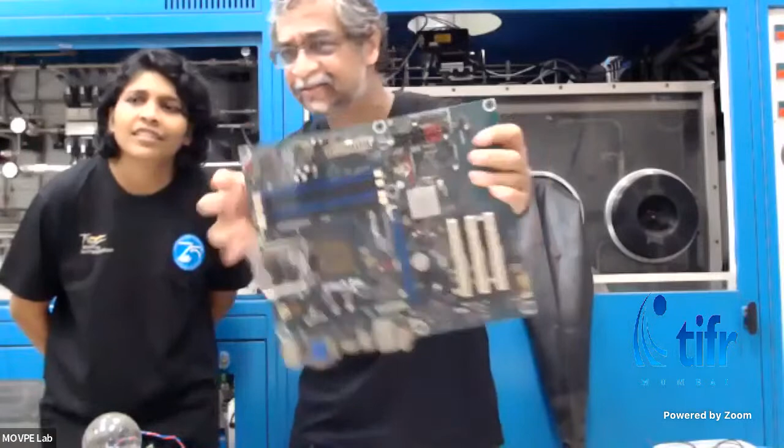Good idea. We should tell them what semiconductors are and what optoelectronics are. Let's start with electronics itself. Have you seen something like this? Manisha, do you know what this is, the thing I'm holding in front of the camera? I think we can ask the audience what it is made of. It's a circuit board.

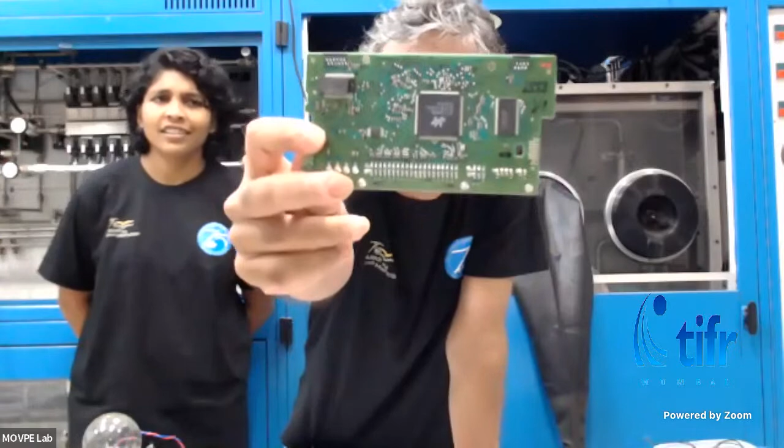Okay, so this is a circuit board, the motherboard for a computer. I took it out, and on these boards you find lots of these printed circuit board cards which have these chips on it. You can see these chips. Manisha, do you know what these chips are made of?

We should ask the audience. Audience, why don't you put in the chat what these chips are made of? These semiconductor chips that you see in these boards, or even on the motherboard, what are all these chips made of? Let's see what people are putting in the chat. So folks who are looking at the chat, please tell us. Somebody read out what people are saying. We'll give them a little bit of time. What are people saying on YouTube? What are people saying on Zoom?

Anyone? Is it a semiconductor? Okay, great, that's correct. These chips are made of semiconductors. And do you know which material is used as a semiconductor? They're saying silicon. Okay, that is correct. Most of the semiconductor world is made of silicon. And silicon is great. Silicon allows you to make these transistors, make all these chips. You can make various things - computers, electronics, radios, TVs. All that is the world of silicon.

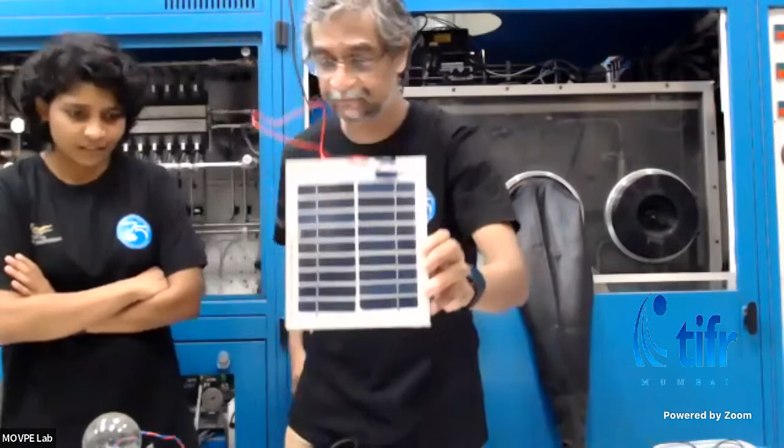Silicon is also very important because you can use it to make solar cells, right? Here's a solar cell, and we have three little LEDs over here. Let's see if they're glowing - not in the room lights, but we have some really nice and big, good old lights over here. So Manisha, do you want to turn it on?

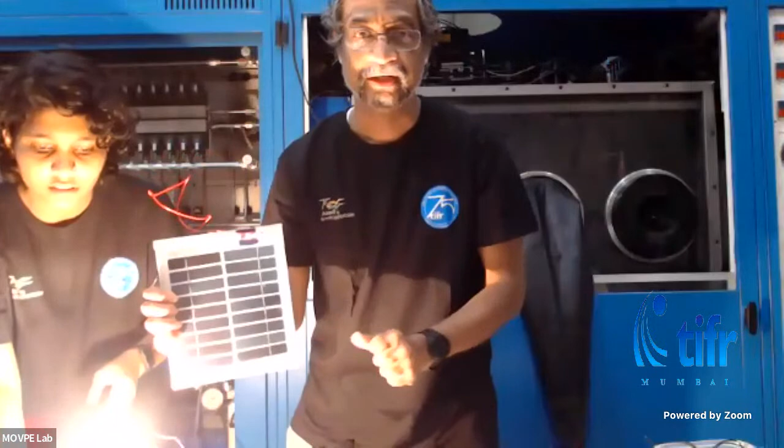Okay, and now you can see these - well, you can't see these, but maybe what we can do is cover this a bit. Yeah, you can, but you could have showed. Okay, turn it off, turn it off. Did you see the top three little dots? They went on and off. Turn it on again. So look at the dots over here. Yeah, you can see a little glow coming. Those were the LEDs we had connected to the solar cell. So silicon also makes solar cells, and that's another very important aspect we want to cover today, of course.

Have you ever wondered what is inside one of these chips? I'm just going to show you. These are very old things. TIFR actually started silicon work in India in the 1970s, and I still have stuff in the lab.

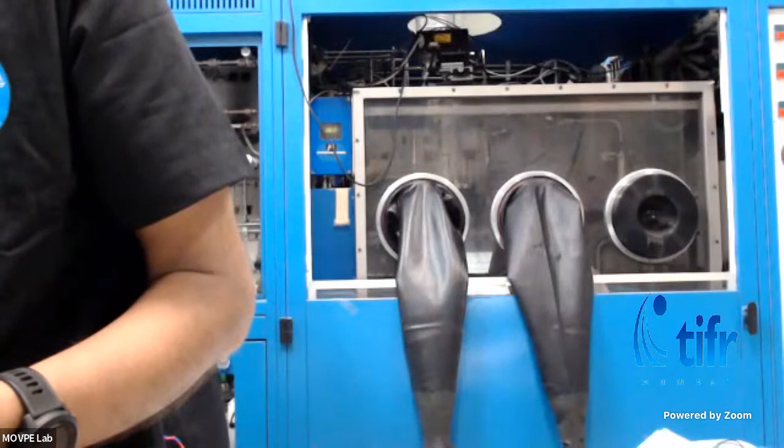Can we enable chat for the audience? Why is it not enabled? Please enable chat for the audience. Whoever is on YouTube, chat on YouTube or chat on... Ulhas, can you check if chat is enabled on YouTube? If it's not, please enable it. Anyway, while we do that,

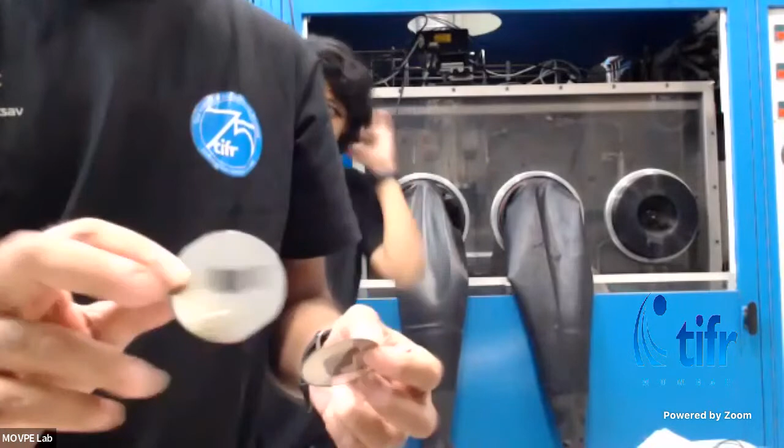yes, somebody has said germanium is also a semiconductor. That's correct. I'll come to it in a second. But these shiny things are what silicon wafers look like. And when people make circuits out of this, what is inside the thing is actually, oops, it's so shiny that you can see the reflection. Let's see if I can, yeah.

This greenish thing that you see, a lot of small things in it. That is, yeah, there you go. Let's focus. That is what is inside one of these little chips, but that's again not what we are going to do today.

There's something called opto. Remember, I said opto. Opto comes from optics or light. So silicon is used for optoelectronics. Silicon is used for solar cells. Silicon is great at absorbing light, but silicon doesn't emit light.

So if you want to make something that emits light, something to replace the bulbs, tube lights, CFLs, right? Then you need a different material. Okay, I won't explain right now. Maybe in the end, if somebody asks why does silicon not emit light, we can look at it.

But okay, I can't see the chat, right? So if there's something interesting happening on the chat, please let me know. Or the Q&A box in chat, both of them. Yeah, if there is something, I'll stop you. Yeah, we'll stop. We'll interrupt.

You keep saying semiconductor. So maybe we can ask the audience what a semiconductor is. Okay, good question. Yes, we should absolutely know that the audience is with us. I see somebody's name says 7A, so I assume they're in the 7th standard. So I hope you've heard the word semiconductor. Maybe you can put in the chat what is a semiconductor. Do you know? If you've heard of conductors, insulators, semiconductors.

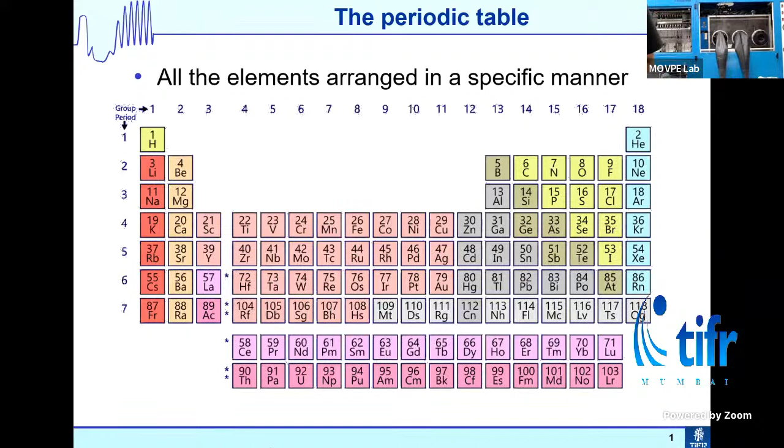Okay, so let's start with the periodic table. In the periodic table, there are what we said were semiconductors. This is silicon and germanium. They are in what is today called group 14. Earlier it was called group 4. So these are the materials. And you must have heard people talking about bands. So in case you don't know what a band is, let me tell you.

Suppose you had just individual atoms. Individual atoms have energy levels. There's some lower energy level, higher energy level, still higher energy level. Now, that's for an isolated atom. When you make a solid, you bring many, many atoms together.

If you bring 2 atoms together, the individual levels will double. If you bring 3, they'll become 3 more. When you bring millions and billions of atoms together, remember that solids have 10 to the 23, Avogadro's number kind of atoms, then you don't see these individual levels anymore.

They all get mixed up and they form something called a band. And depending on the energy the electron has, some of these bands have lots of electrons in them. Some of them are completely full. If it's completely full, there's no space for another electron to go in there. Sometimes the band could be completely empty, in which case, if I put an electron there, it can travel because there's lots of space in that band.

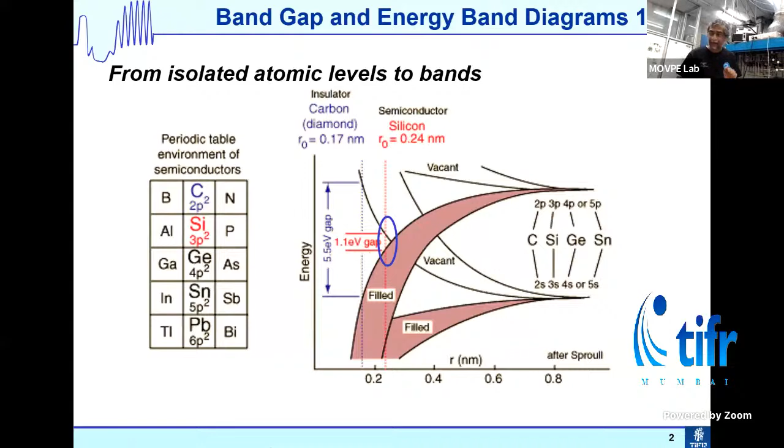So resistance depends also on the length and the area, lots of other things. What in physics people mostly refer to as resistivity: how much resistance per some area that the current is flowing through. But don't worry about it. The idea is correct. Well, let's go on. So we know what a semiconductor is. But remember I said silicon doesn't emit light.

What kind of semiconductors do we use? What would emit light? You know what? We have to make artificial materials. So how do you make such materials? We make it in this big box, but before that, let's see what are the materials we make. Okay. So again, what you see on your screen is a part of the periodic table.

Now, you will call it group 13, 14, 15. When I was in school, there was still group 3, 4, 5. The people who started this field of research, when they were doing their research, it was also called group 3, 4, 5. So we'll just refer to that. So now, remember carbon, silicon, germanium, all these materials are in group 4.

So germanium is sitting here. To the left of germanium is gallium. To the right of germanium is arsenic. If I take one atom of gallium and one atom of arsenic, I can make a structure that resembles germanium.

So if you take an element from group 3, the boron, aluminum, gallium, indium group, and an element from group 5, the nitrogen, phosphorus, arsenic, antimony group, and you combine these, you can also make materials which are semiconductors. Of course, these are not elemental semiconductors. These are compound semiconductors because we're making a compound of elements.

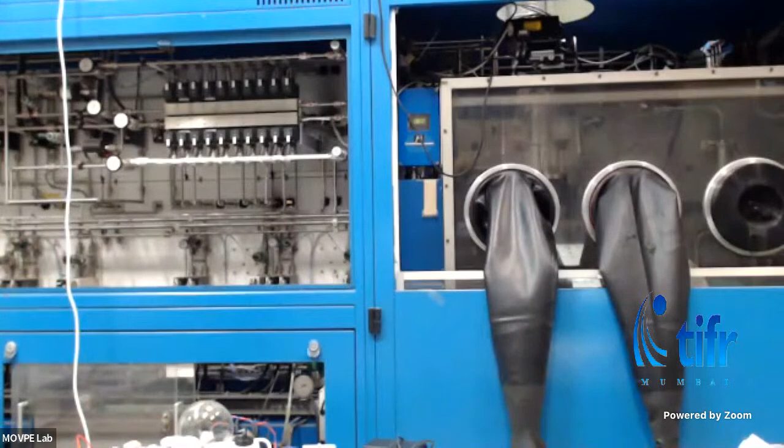So let's just see. Maybe I'll share the screen again. Yeah, can you just share the screen perhaps? Maybe it's a good time to just take a look at the chat as well.

Okay. So what we do is we are depositing these materials using chemical reactions in a layer by layer manner. So how do we start? What do I use for my gallium? I don't use gallium. I use gallium with 3 methyl groups. Methyl is CH3, methane is CH4. CH3 is the methyl group. So trimethyl gallium: gallium atom, 3 methyl groups attached to it. For the nitrogen, I start with ammonia. Ammonia is a gas. You might smell ammonia in the chemistry lab. Any public toilet, the smell you get, that's ammonia.

So we start with ammonia, which is a gas. We start with trimethyl gallium, that's a liquid. We convert everything to a gas. I'll explain this, it's vapor phase epitaxy. But let's look at what chemistry we are doing. So we are taking this trimethyl gallium and ammonia, and we will heat it up. Heat it up how much? Maybe something like 800, 900, 1000 degrees centigrade. Make it hot, really hot.

At this temperature, this ammonia breaks up. So I can get nitrogen from there. Nitrogen and hydrogen. Yeah, I don't care about the hydrogen. I want the nitrogen. And for the trimethyl gallium also, these methyl groups go away. So when I get trimethyl gallium and ammonia at the high temperature, these methyls go away. So there's gallium, there's nitrogen because the hydrogens have gone away. So gallium and nitrogen can deposit and form gallium nitride. It's not that easy.

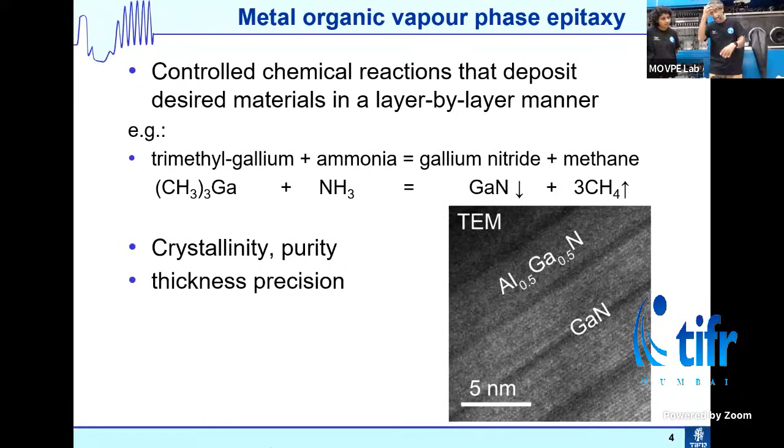Can we just have the next one? I'm just wondering what it is. Yeah, just go ahead. Okay, go ahead. No, the previous one. Yeah.

So now, of course, this equation is very simple, but I want to really grow high quality materials. I want to grow different materials and make LEDs and transistors and make devices. So as a person who operates this machine, what do I change? I can change the temperature. I can change various things, the pressure, the gas I use. So let's now look at, you can stop the screen share.

Now, we'll tell you a little bit about what happens in this lab over here. So what are we trying to do? We are trying to take trimethyl gallium, react it with ammonia, and make gallium nitride. And what we will do is, we will deposit it on a wafer, on a piece of sapphire. So this is a sapphire wafer. You can hold it near the camera. This is a sapphire wafer. We will deposit this thing on it.

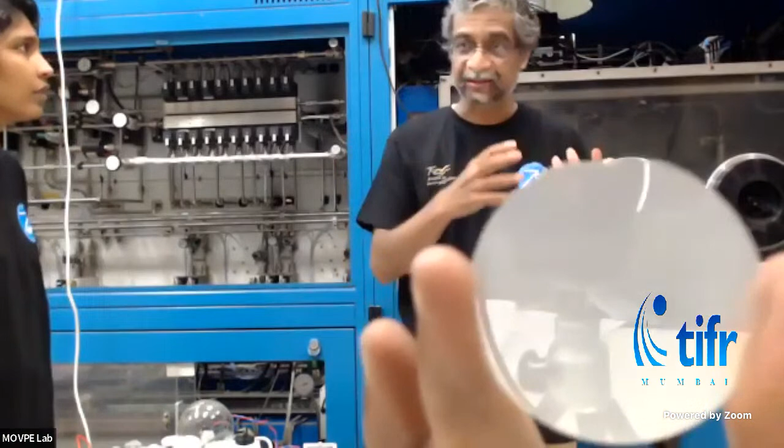Why do we use sapphire? Well, can you tell us something about the substrate we use? I heard something about lattice matching. Yeah, okay, lattice matching. We're already getting into that. We'll definitely come to lattice matching. But maybe what we'll do is we'll tell them what all this is.

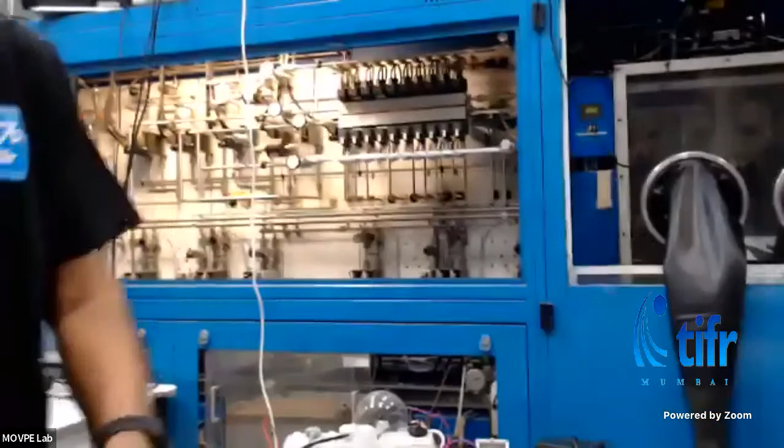Yeah. So right now, let's do one thing. Let's turn the light on. So this. Okay. Yeah, you can just hold it so I can tell you what is what over here. So let's turn that light on also. So we will eventually go there. I'll take it there.

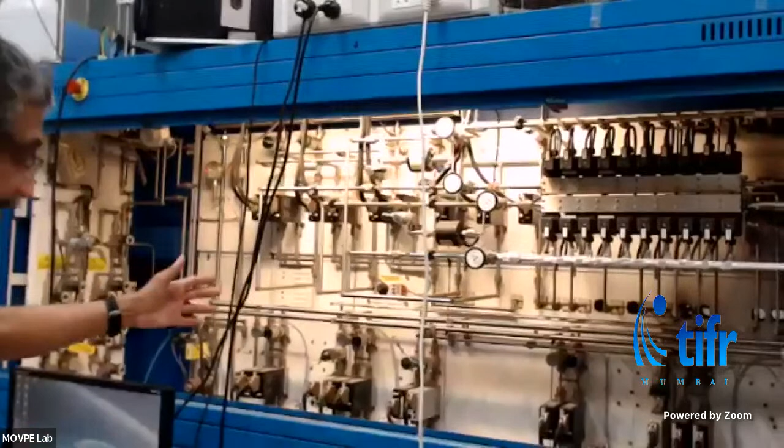Okay. So what we have here, this part of the system, this is all chemical engineering. It's all chemical engineering designed to transport the correct amounts of these reagents for the reactions into the place where the reaction will happen. So what we have here are all kinds of valves. It's a maze of valves, pressure controllers, flow controllers, everything designed to mix. So suppose I'm doing aluminum gallium nitride, I need to mix the correct amount of trimethyl aluminum and trimethyl gallium.

Now, you asked me, trimethyl gallium was a liquid, right? Yeah. And everything out here I said will happen from a gas. Yes. So how do you convert a liquid to a gas? Well, one thing, you can boil it, you get a vapor. But at any temperature, for any liquid, above the liquid there is some vapor. Some molecules are always evaporating. So what I do is, I have these liquids in a container, and I bubble.

Just imagine taking a straw and blowing through it, and you get bubbles coming through the liquid. You bubble a very, very pure gas through it. Remember, purity is everything over here. Which gas? Well, right now you can purify nitrogen also, but the only gas which you can purify to 99 and then seven nines pure is hydrogen.

So do we purify the gas here? Yes. Nobody in India sells you 99.9999 that kind of hydrogen. But hydrogen is one element which is, not easy, but possible to purify. And that's because there is another element that comes to the rescue. This is a metal called palladium.

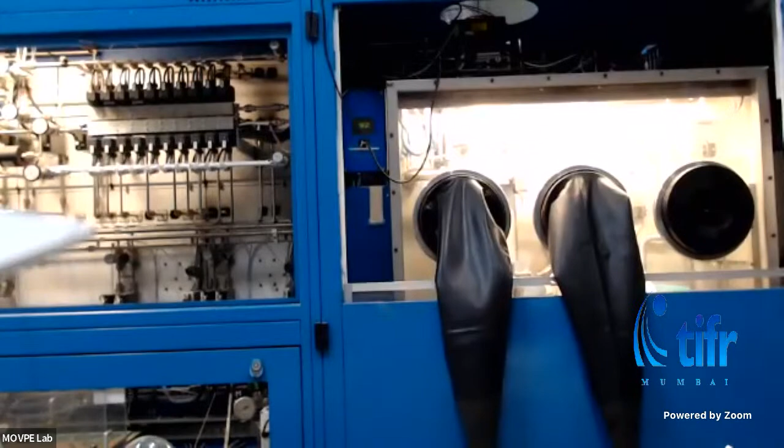So I was wondering, what are these gloves? Ah, the gloves. See, remember, I've said purity is everything. But we are in Mumbai. There's so much dust in the air, so much pollution, TIFR is right next to the sea. There's so much water vapor in the air. Not good. We don't want all those molecules.

So one option is you keep your entire lab super clean. But what we decided is, only the place where the reaction happens, we'll keep it in what is called a glove box. Rahman is going to come here and show you how this is used. This glove box has extremely pure nitrogen inside it. So whenever we open the reactor, put stuff in, it never sees the Mumbai atmosphere. We keep it isolated and very pure by using ultra pure nitrogen.

And how do we put things inside this box? Well, what do you think? We put things inside 10 years back when we built this and never put anything? No, of course we need to put things inside. Well, it's got something called a load lock. We'll show you the load lock later. There are two doors.

So there's a region in the middle. You open the outside door, you get something in, you shut it. Then you remove the air from it, put nitrogen back. Do this many times. So now the region in between, which was exposed to the outside air, only has the pure nitrogen gas. Then you open the other one and take it inside this chamber. We'll show you that.

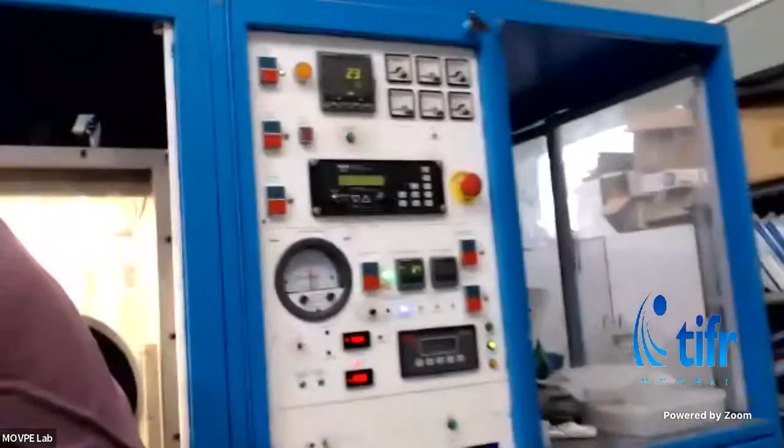Let me do one thing. 1 second. Let's keep the laptop here. Let's carry that. And I'm going to hold this and try and see what we have.

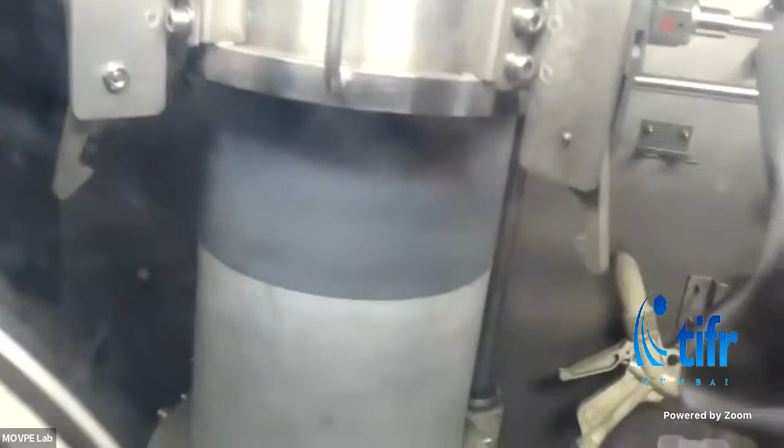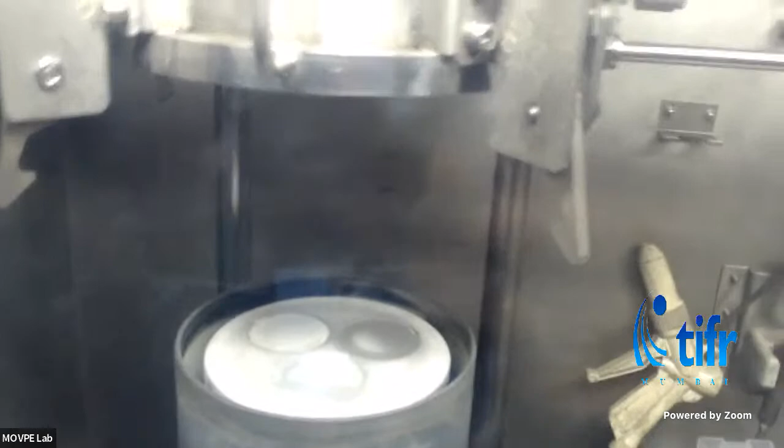So here is Rahman. He's going to operate the thing, but first let's show what is inside here. What you're seeing inside here is a reactor. Why don't you lower it so people can see? Good. So what you see here is a plate. I see 3 circles. You see 3 circles because this is a plate in which you can keep 3 of these wafers, the wafers we showed.

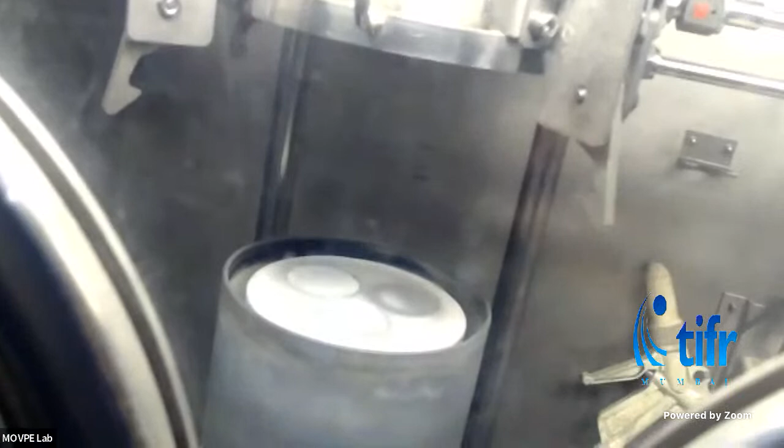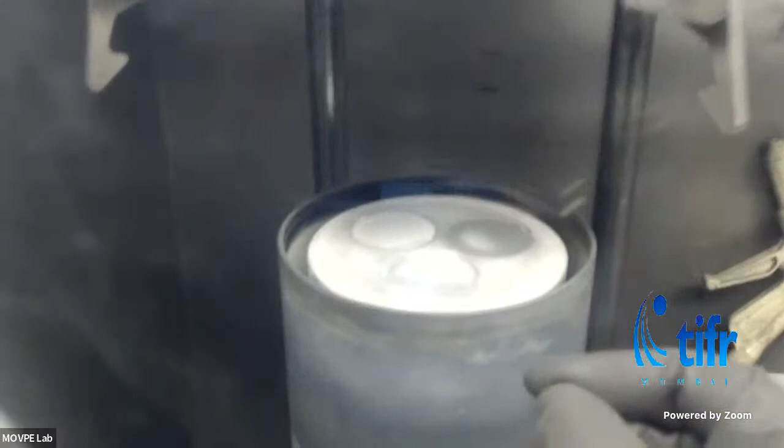You can keep 3 such wafers in it. Or okay, we can just show them that. And then this whole thing will move up, and below this plate is actually a heater which can heat things up to almost 1200 degrees centigrade, depending on the material we are growing.

So from the top, you saw where the gases are mixed, then the mixed gases come to the top over here and there are tubes through which it comes in. It's tough to show you that because we'd have to put the camera inside the box, which is inside the glove box, which would be tough. But yeah, this is the reactor, actually, where we think you can put it up.

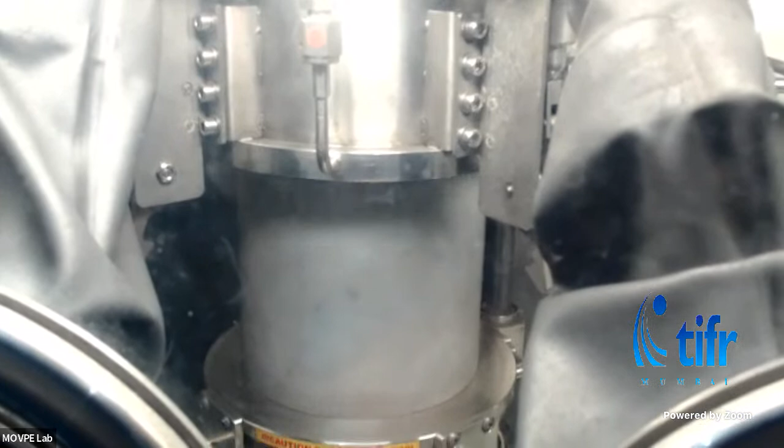So we would load this thing, and then it would go up, and the gases come from the top over there.

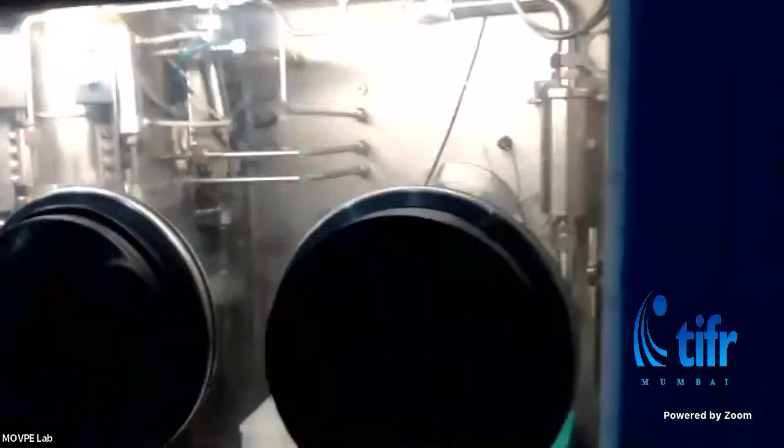And what you asked earlier, you see this little door over here? This is the door. You can open it from this side and get things inside. This is the connection to the outside world. You open that door and get things in. There's a compartment between this place and here. This is the outer door. So you can open this, put whatever you want in. Right now we're in the room, this is the access from the room. You put stuff in here, shut this door, and then there are a lot of...

So there is nitrogen inside. Right now there's nitrogen, but when you open it, there'll be air inside it. So there's a vacuum pump - you can remove the air, put nitrogen, remove the air, put nitrogen. It does this automatically, actually three times. And then you move this door - you can open this door from the inside after closing that door. If you don't close that door, of course it will not let you do it.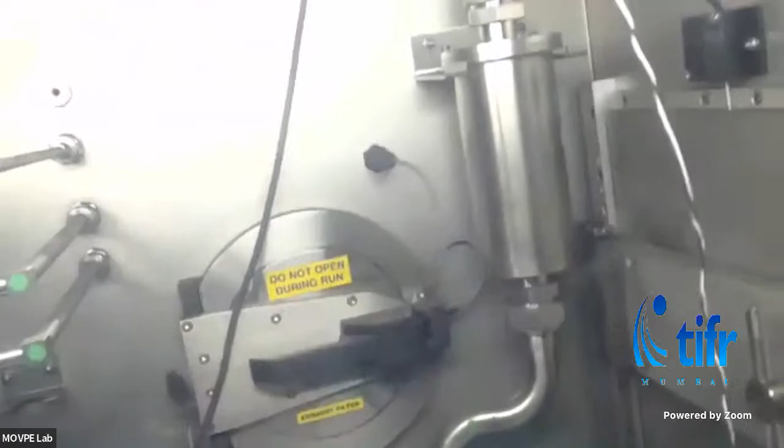And this is what you have. Of course, inside there are lots of other things to clean the place and pick things up. You have to pick it up using some vacuum - you can't pick it up with your hands. There's a little vacuum pickup that helps you pick it up.

Okay, so yeah, that's it. And I do see large bellows coming from the reactor top and going onto the roof - what are those bellows? Oh, you're asking what are those? These things at the top. Yeah, and lots of tubes all around there. Yeah, okay, so it's okay, it can be there.

What is the name of this whole machine? This whole machine is called a metal organic chemical vapor deposition system, or a metal organic vapor phase epitaxy system.

Now, remember I said that we have to be very careful about purity - everything has to be very pure. But there's another equally important thing: we have to be very careful about safety as well. Did you ever like to smell a public toilet? No, you didn't, right? So ammonia smells bad - you must have smelled it in the chemistry lab as well. Ammonia smells really bad, but at least when you smell ammonia, it's at a limit that won't kill you. You smell it before the level at which it becomes really toxic or dangerous.

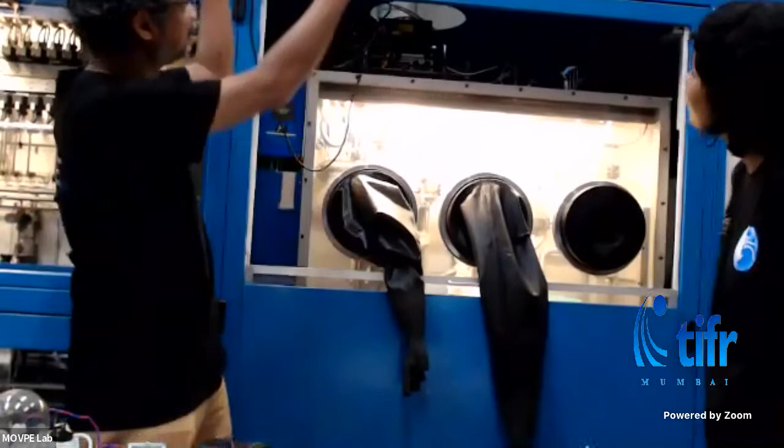Step one: you see these big things above the reactor, these two very big pipes going up. What we have in the roof are very big exhaust fans. Remember the exhaust fan in the kitchen? That's small, probably a few hundred cubic feet per minute. We have two fans of 3,500 cubic feet per minute, just sucking the air out of the room.

Today we're not operating, so we've removed these covers to show you, but otherwise everything is usually blocked off, with little slits through which air goes in, because the air is being sucked outside the system. So the idea is, in case a pipe breaks or there's a small leak, nothing will come into the room. It will go up into the roof, and there's so much dilution, mixing it with so much fresh air, that when it goes outside it's probably below the limit.

Also, we are using hydrogen as the carrier gas. We flow maybe a few liters of hydrogen every minute, and when we are really growing, it could be 20 liters a minute. Hydrogen is flammable, and we don't want a hydrogen leak. So we have lots of toxic and flammable gas hydrogen sensors around, and our sensors are so sensitive that we will detect a very, very small, parts per million leak.

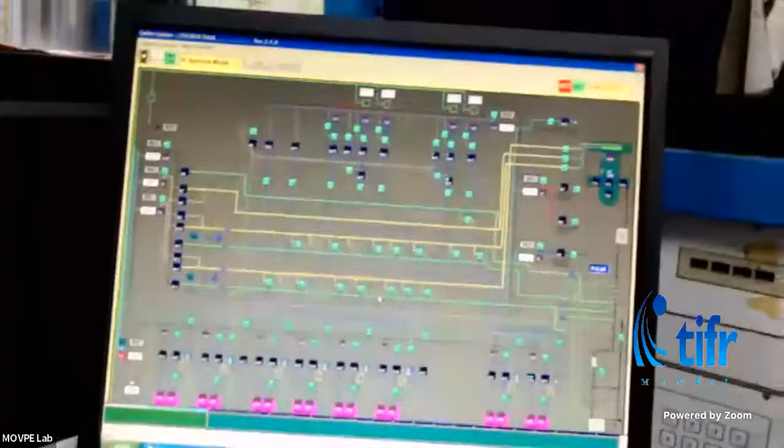So how do we control the system is a good thing - maybe we'll show them the control screen as well. It's almost like playing a video game. There's no physical way to control the valves here; they're all controlled by this computer screen.

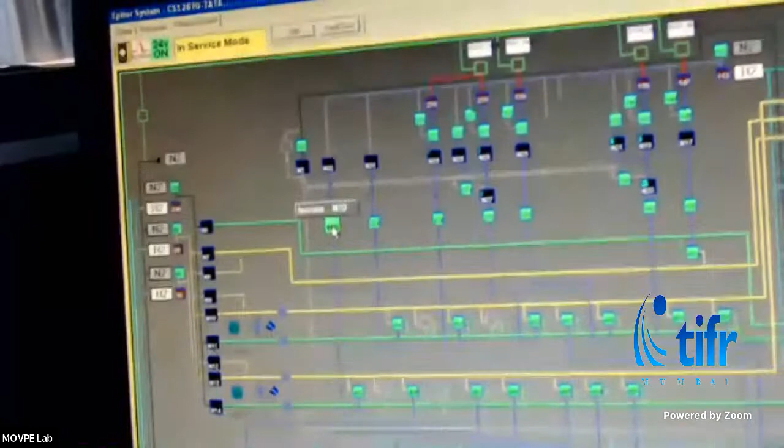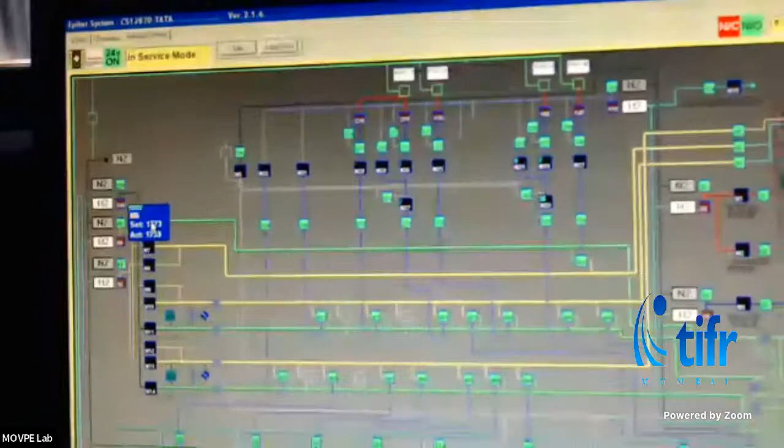This screen shows the position of all the valves. If I click on a valve, you see it changes color - I've shut it off. And if I click on a flow meter, I can change the value of the flow, and if I send it, it will change the value. So it's almost like playing a video game - you can control everything from here.

You can also write programs that control all this for you, because if you're controlling 100 valves at a time, you can't do it manually - you can't even click, you'd go mad. So you write programs that tell the system what valves to operate.

Okay, so at the end of it, what happened? Oops, no, somebody pressed something. What's going on? It's got disconnected - the camera seems to have moved.

Okay, we are back on. We've got the camera back on. Sorry, when we moved the laptop, we disconnected the camera by mistake. That's live, that's what happens. You're live in the lab.

So now what do we do here? What do we make here? How does this thing look? Let me tell you what we do. What do we deposit layer by layer? Let me just quickly show you that.

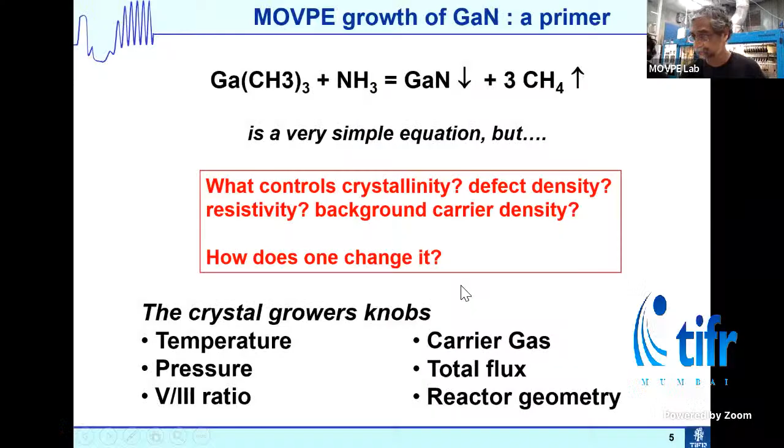So one of the simple things machines like this make are light emitting diodes, LEDs. You may have heard of a diode, it's something that allows current to flow one way. A diode requires two kinds of semiconductors, a p-type one and an n-type one. Don't worry if you don't know what that is. The stuff that happens where the p and n-type materials meet is called a p-n junction.

At this junction is the secret sauce for the LED. What do we do? On sapphire, we grow gallium nitride about 1 micron thick. 1 micron is about 50 times thinner than your hair, or 100 times thinner. If you have nice thick hair, for me it will be 50, for you it will be 100.

Then you grow some N-type gallium nitride and P-type gallium nitride, and in between the two is where you have what are called quantum wells. Quantum wells are very thin layers of semiconductors, we have indium gallium nitride. How thin? 4 nanometers thin, separated by 10 nanometers. This is the region that emits light. By controlling how much indium I put in the indium gallium nitride, I can control the color.

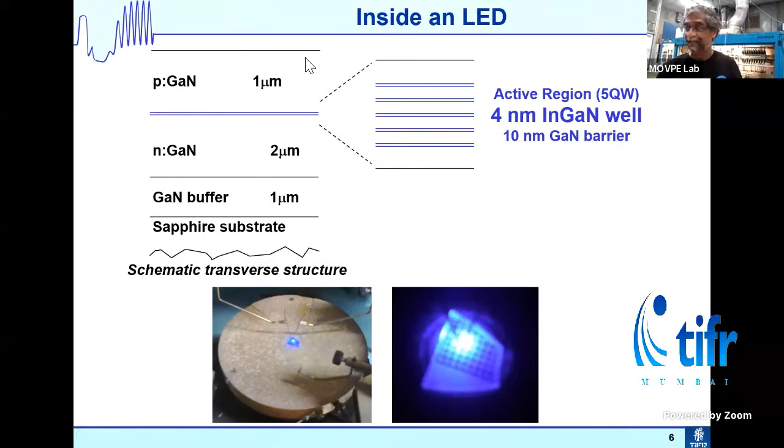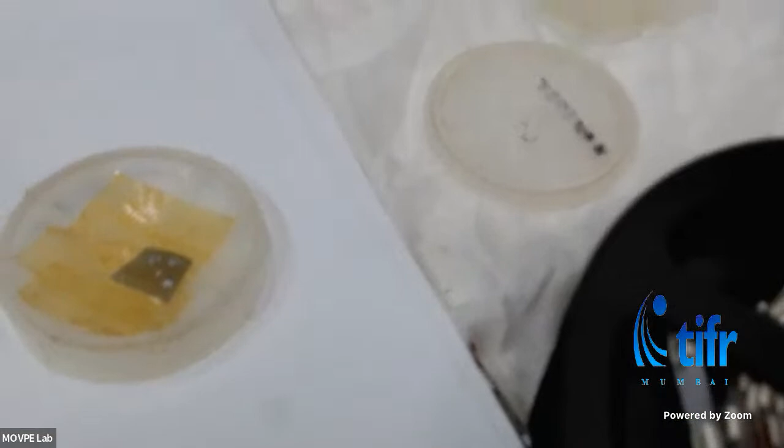So here you see some devices which we had made. But the beauty of it is, because it's blue light which you can see with your eyes, we can actually show this to you right here. So Manisha will show this to you. First let's see what we have: a little piece of semiconductor on which we've made some contacts, contacts to the N and the P.

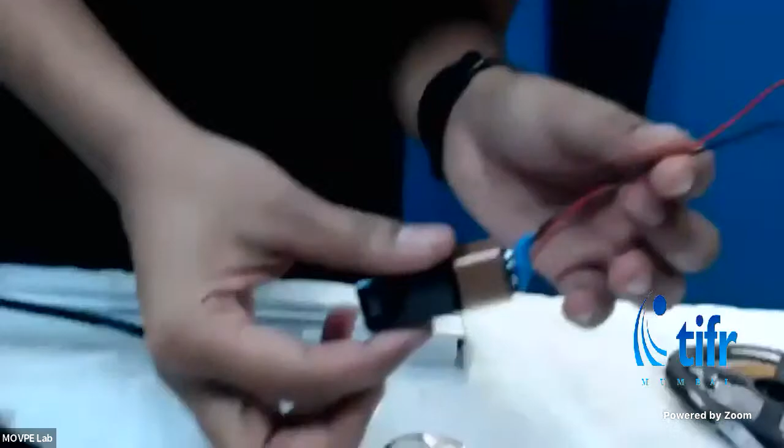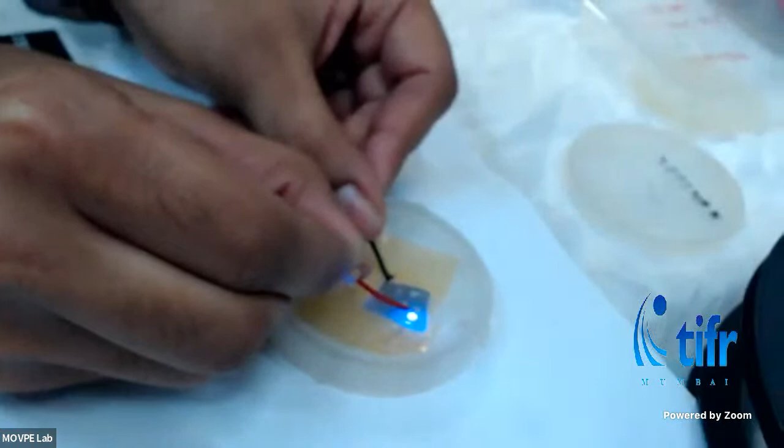And what Manisha has in her hand is a 9-volt battery and some wires. She'll just try and connect the wires N to N and P to P. And you see it's glowing blue. That is a blue LED which was made in this machine right here. Okay.

The nice thing is, how do we actually... wait, let me just see if I can go to the next slide. Remember, you want to make LEDs of different colors. Now the simplest way to do it: I have a reactor where it's very difficult to say, okay, put exactly 23% indium in. We can't control the indium concentration so much. The way we do it is by playing with things we can control.

This is again Preeti's work, where just by playing with the temperature - remember I said I can heat this up to 1200, I don't have to do it, that's the maximum - if I grow something at 725 degrees centigrade or 775 Celsius, it'll just depend. In one case you get blue, in the other case you get more indium, you get green. So that's what we do in our everyday research, we are playing with the parameters to try and change the kind of materials we grow.

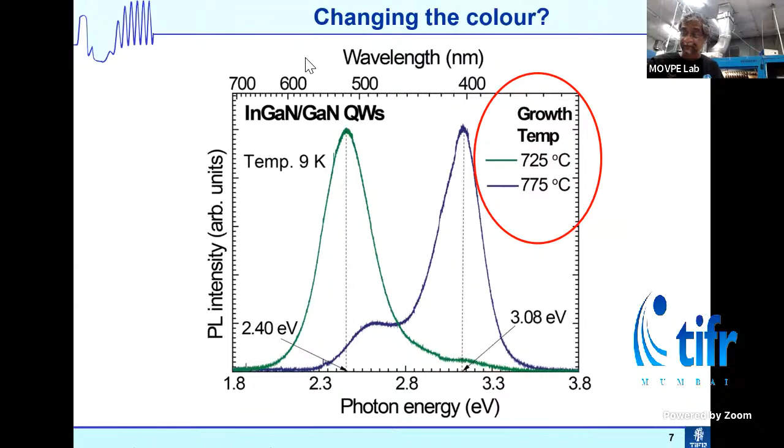And yeah, these blue LEDs are super important. If you remember, about 10 years ago, Akasaki, Amano, and Nakamura got the Nobel Prize in Physics for inventing the blue LED, because the blue LED allows you to make white LEDs.

And what I didn't tell you, of course, is how do we make these chips? I think somebody asked in the very beginning, how do we make these chips? First you must understand how small these LED chips are. The LED, of course, you can see it - if you have a mobile phone, you can see your flash, that is an LED. You can see how small the chips are.

What we would do when we grow a wafer: suppose we had a wafer of gallium nitride or some LED structure which was like this. We would take it to another lab, which is called a clean room, and then we would make devices out of it. We would put metal contacts, say where does the current go, where does the current come out of, and then put wires through that, etc.

And these chips are really small. I don't have LEDs with me. I have something else which was made in our lab, not in this machine, in another older machine. These are lasers, laser diodes, the lasers in your laser pointer, laser printer. They're also very tiny. And how tiny are they? Well, there are many in this box that you don't see. So let me just take some out. There are hopefully some of them here. Yeah, so this is a box.

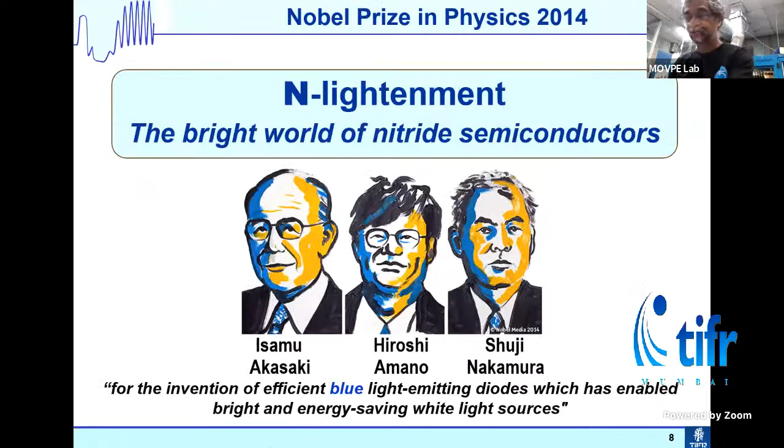This is something the camera is not even going to pick up. Many of these things, the lines that you see, the little small things, usually will have about 10 chips on them. So these chips are really, really small. If you want to know more about how we make them, you can ask me later. But let's see something about white LEDs. How do you make white light? Remember, they got the Nobel Prize for making blue LEDs, which enable bright and energy-saving white light sources. Okay, let me just stop screen sharing.

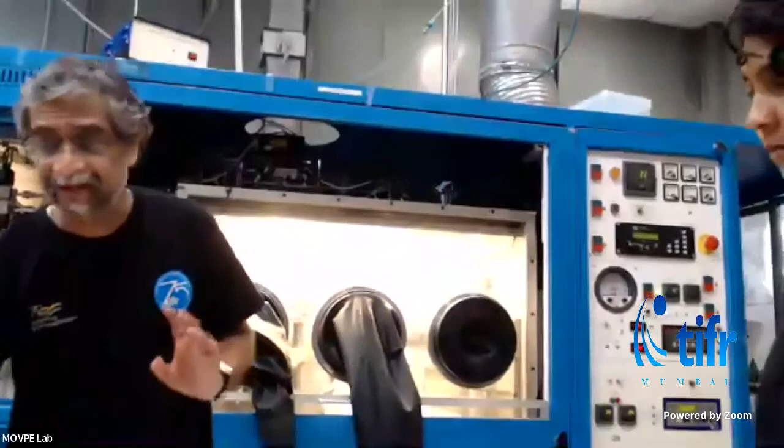Okay, so let's see. You all have mobile phones. Mobile phones have this flash. The flash is an LED. First thing, lighting has changed. Earlier you had these big bulbs, right? The bulbs which glow and get hot, and there's a filament. You can see the filament getting hot, and when I switch it off, you can see it as it cools down. From these bulbs, we went to tube lights, the tube lights which are there in our roof, perhaps. But there are also these compact fluorescent lights, CFLs. The bulb gets very hot, it's still hot. You can't touch it. In operation, a CFL is much more efficient.

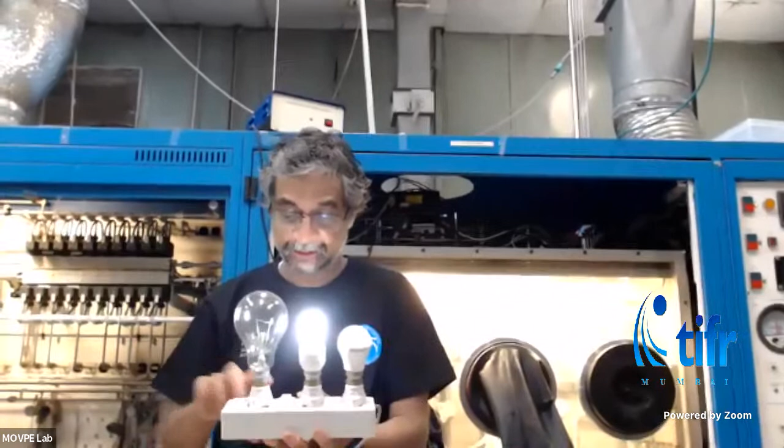A bulb, 95% of the energy is heat, only 5% is light. Tube lights and CFLs are much more efficient. They probably make around 20% of the energy that they get into light. And even more efficient are LED lamps. These are LED lamps which we use these days. Now, what is inside an LED lamp? If I took this bulb and I opened it up, what would we find? We have done this for the purpose of science, and what we have inside a bulb is this. This is what is emitting the light.

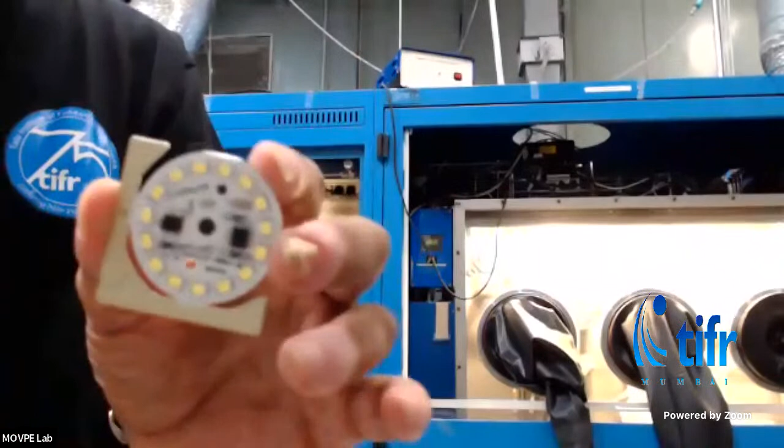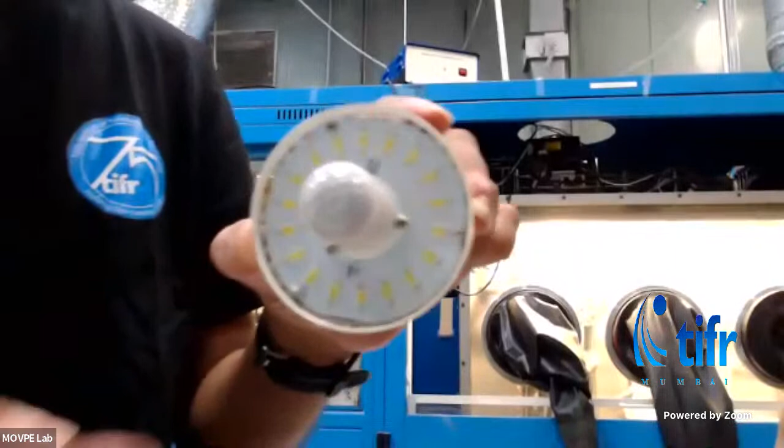As you can see, there are many of these LEDs. And what color are they? Are they blue? No. What color do you think they are? Right, they're yellow. Well, here's a bigger bulb. And here, yes, Mayank, they are all yellow. In fact, look at your camera phone closely. You will see that the LED is yellowish. And if you have a very high-end phone, it might have two LEDs, one of which is slightly reddish. You see, this has two LEDs. One is yellow and one is reddish.

So, but we want to make white light, right? What is white light? White light is a combination of the primary colors. The primary colors are green, red, blue. Now remember, when you mix paints, red, blue, and green give you black. But when you mix light, red, green, and blue give you white. So we have out here red, green, and blue, and if you go sufficiently far away where you can't distinguish them, it will look white to you.

Now, how do you make LEDs? Yes, you can make LEDs. So let me again share a slide to tell you why these LEDs look yellow, because that's the easiest way to make them. One second.

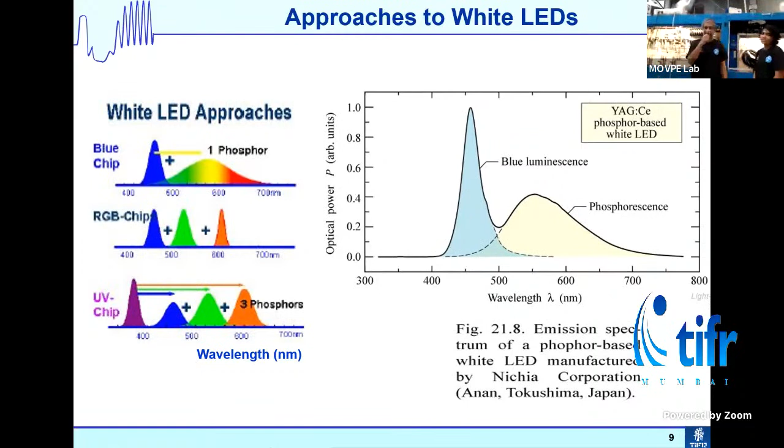So Manisha is asking me whether we can grow only layers in the system or we can do something else. Of course, that's because she works on something else. You have a gallium oxide crystal here? I have. Okay. Manisha works on a different material. It's called gallium oxide. Maybe you can just go near the camera and show them a piece of gallium oxide. She actually grows, not thin layers, but take it.

Okay, you'll have to bend the camera down. Yeah, those glass-like things you see are gallium oxide pieces, and Manisha grows gallium nitride on them. But not gallium nitride layer by layer. What she's trying to do is grow, you can say, skyscrapers of gallium nitride. Imagine how Nariman Point in Mumbai looks with all the skyscrapers, but a million times smaller. So she grows what are called nanowires.

Nanowires, where instead of growing flat, you put down something which will allow the growth to happen only vertically. So you start with a flat thing, and just like grass grows up, you have these wires that are growing up. That's what Manisha works on for her thesis. That's another way of growing things. We won't explain it right now.

Let's see what people have asked, right?

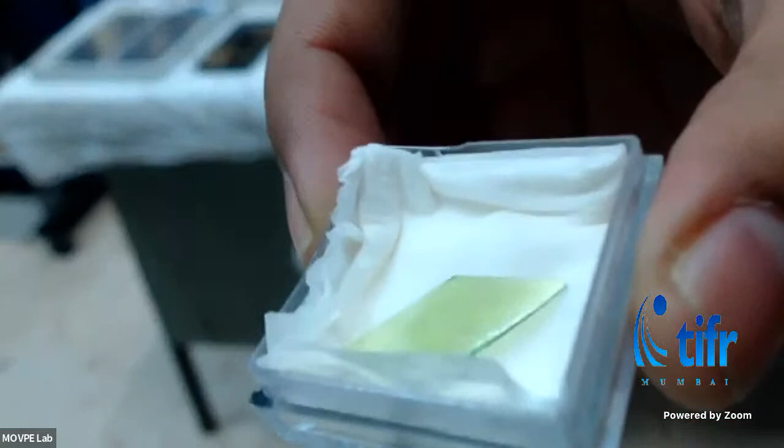There, you see, this is greenish. This is vanadium. This is vanadium-doped gallium oxide. Similarly, when you have sapphire which is doped with other elements, that's when you get colors. Pure sapphire is transparent, and this is not naturally occurring sapphire. These are artificially grown crystals.

You can grow large cylinders of sapphire, and then you can cut them and make crystals. You can get even these big discs of sapphire. We use 2-inch; our system takes three 2-inch wafers. And sapphire is used because it's probably the cheapest material that you can grow on. This 2-inch disc of sapphire costs maybe $10 US if you buy it in bulk.

Gallium arsenide would cost $100 US approximately, order of magnitude. If you had silicon carbide, that would cost $2,000 US. All materials, you can make them, you can get substrates, but they are much more expensive. So we use sapphire. It's also

all these materials, all the compounds, they have a certain crystal structure, right? Some crystals, like salt crystals, are cubic. Gallium nitride happens to have a hexagonal unit cell. Sapphire also has a hexagonal unit cell. So it's easier to grow something hexagonal, imagine your pencil, on something else that's hexagonal, rather than on something that is cubic. So a lot of things go into deciding how you choose a substrate for deposition.

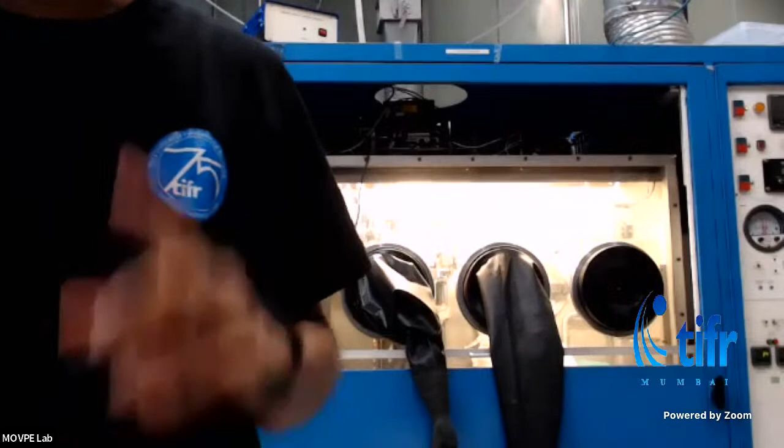Excellent. If you can take a brief question, Gayatri Savarkar is asking, what's the difference between a normal LED and a laser diode? They both emit light, but how does a laser diode get so nicely focused? I was prepared for this. Okay, and this will be the last question because we are at 12:15ish already. I was prepared, so let me just see if I can.